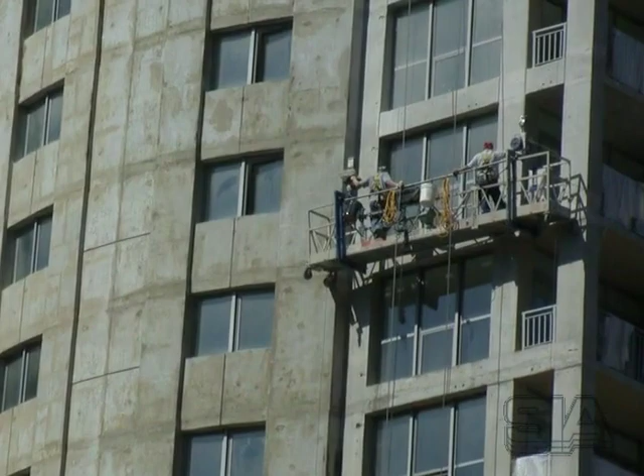The Scaffolding Industry Association, or SIA, is committed to safety. In order to prevent accidents, workers must be trained in the safe use of their equipment, be knowledgeable of the safety codes, and must be able to recognize and correct possible hazards.

Codes of safe practice for suspended scaffolds are available from the SIA SSFI. ANSI recommends procedures, while the CSA and OSHA regulate use along with federal, state, provincial, and local codes.

Suspended Scaffold Basic Rigging and Operating Procedures was developed by the SIA with input from suspended access manufacturers and distributors to help prevent accidents, which usually occur due to rigging errors and lack of fall protection. The material was obtained from many members across North America.

Suspended scaffolds and controlled descent equipment allow people to work at heights that can increase risk for a fall hazard. When properly assembled, rigged, and maintained, they can be used safely to perform a variety of difficult tasks efficiently. A key factor is proper rigging.

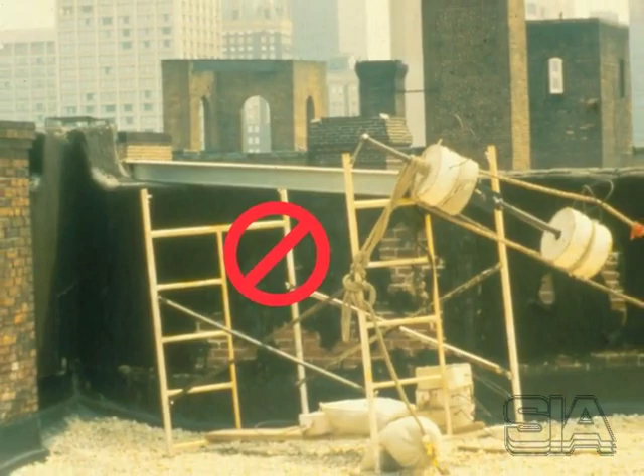Rigging is a very serious matter, since people's lives are at risk. Not only those suspended, but also bystanders below. A system haphazardly built from mismatched components will endanger lives or seriously injure you or others. Poor rigging is extremely dangerous. It will cause accidents. Follow guidelines and the applicable laws.

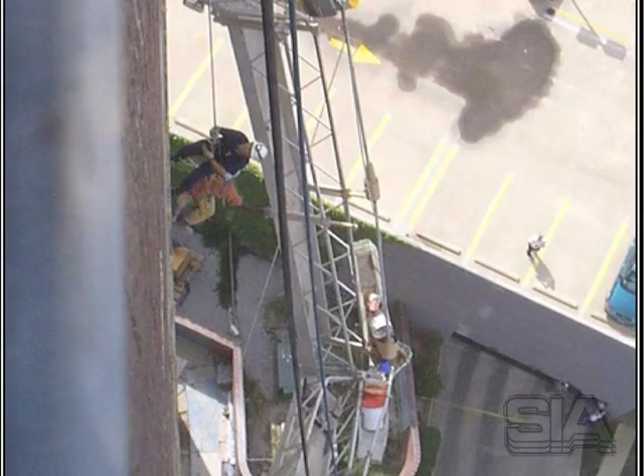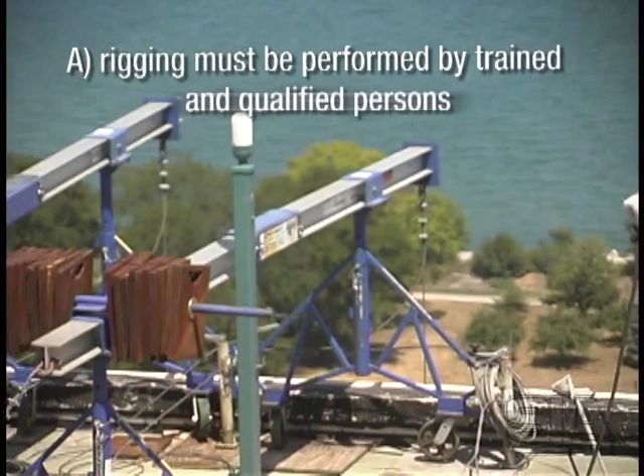The competent person must determine whether the equipment is in proper working order and rigged properly. A. Rigging must be performed by trained and qualified persons. B. All equipment must comply with federal, provincial, state, and local codes.

The employer must instruct and supervise employees in the safe use of equipment and provide manufacturer's instructions. Only workers who have been instructed in the operation, use, and inspection shall operate the suspended scaffold or controlled descent equipment. The SIA Suspended Scaffold Training Program provides these instructions.

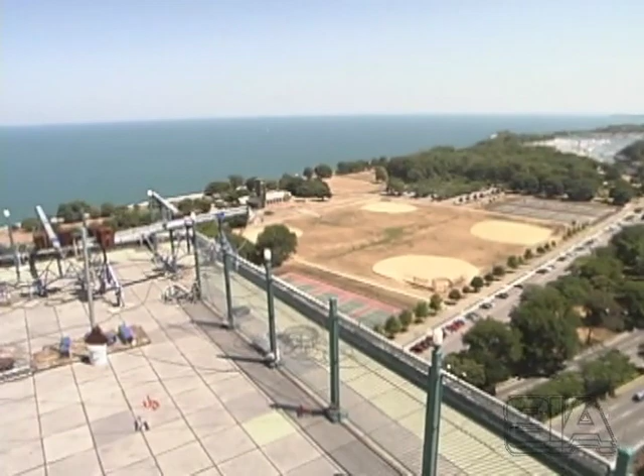A qualified person must develop a plan for installation and relocation of suspended access equipment. Refer to the SIA Job Hazard Checklist for suspended scaffolds for assistance. The 4 basic equipment groups that must be examined are: 1. The support equipment on the roof. 2. The suspended equipment. 3. The fall protection equipment. And 4. The wire ropes and power cords.

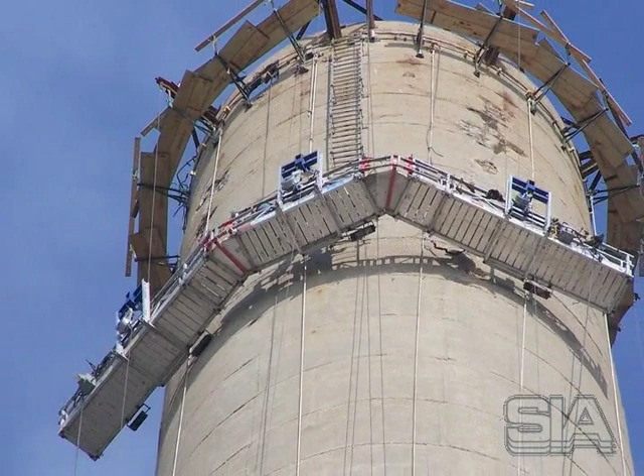Rooftops, vessels, and structures create various challenges. A qualified person needs to determine equipment needed and locate suitable anchorages for fall protection equipment. Structural parapet walls must be capable of withstanding the overturning loads imposed on them with a safety factor of 4. A qualified person must evaluate the parapet. If any question exists, do not rig from it or rest a beam on it.

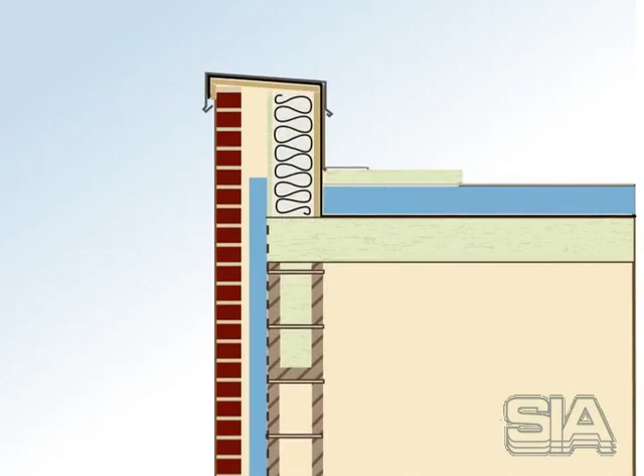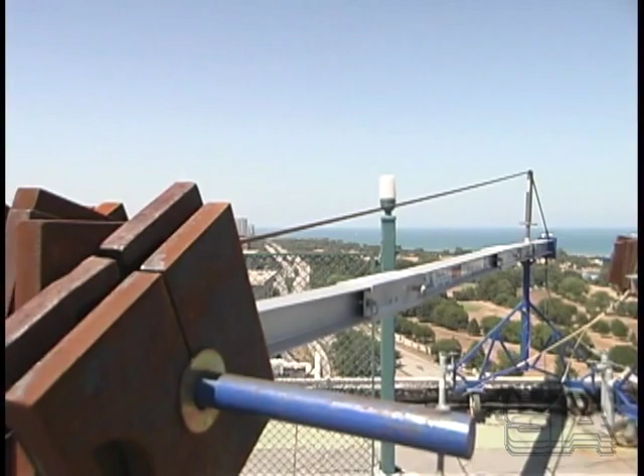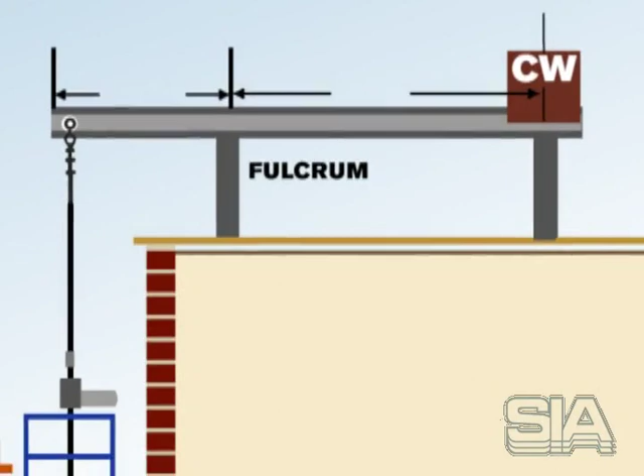Qualified persons who provide structural drawings of a parapet must beware of block, brick, stone, expanded foam, or metal-covered parapets, which probably will not take the load. Counterweighted outrigger beam systems should be used when the parapet strength is questionable. This system must be designed and assembled to resist 4 times the overturning moment created by the hoist or suspended load. A formula determines the counterweight needed to provide a safety factor of 4.

Calculations must be accurate. If the outreach changes, the counterweight must be recalculated by a qualified person. Excessive outreach can cause the beam to fail. All rigging has limitations. Follow the manufacturer's instructions.

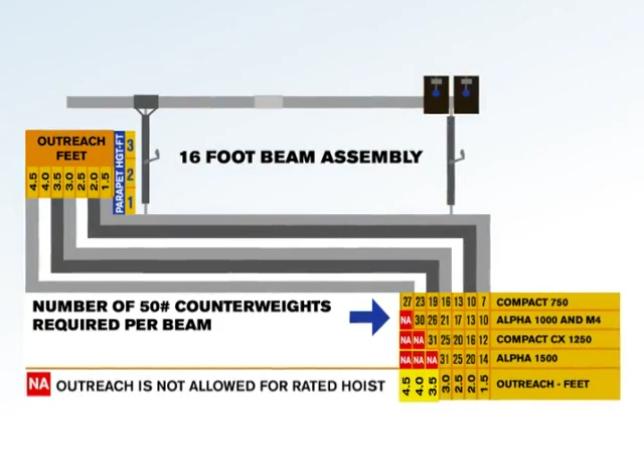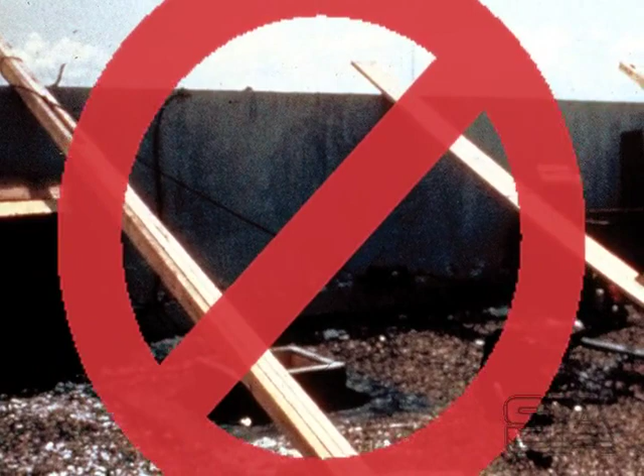Protect the roof and distribute the load at the bearing points using plywood or planks. A qualified person must be able to determine that the roof can carry the load of the rigging. Do not use outrigger beams made of wood. Do not use flowable materials such as sand or water for counterweight materials.

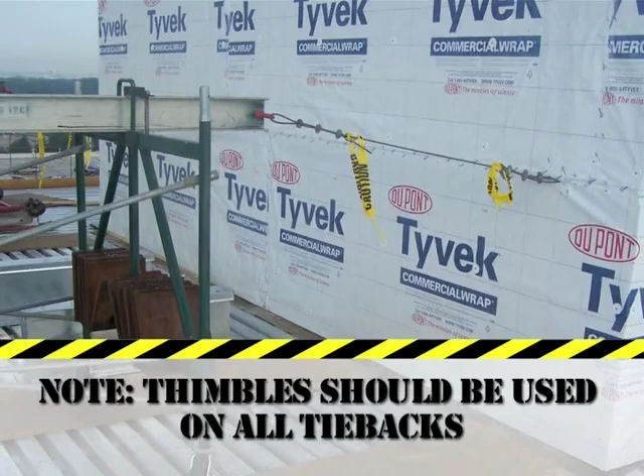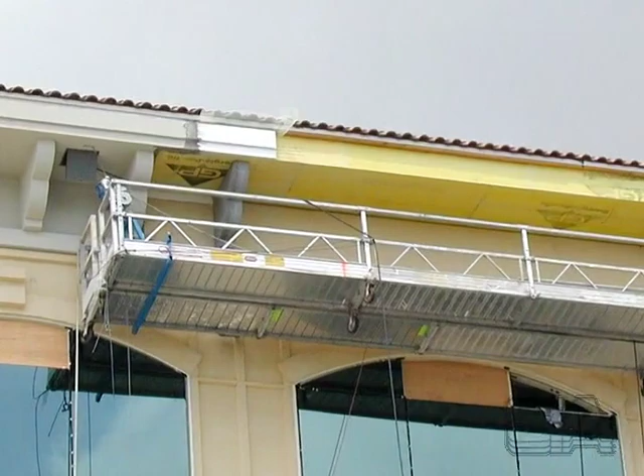Tiebacks are mandatory to prevent rigging devices from moving and coming off the structure. Movement can spell disaster. Shown is a proper tieback. Spacing is critical to avoid unintended movement or overturning of the topside rigging or platform, and will prevent excessive forces applied against the structure. Hoist to hoist and outrigger to outrigger attachment spacing must be the same, in addition to hoist to wall spacing.

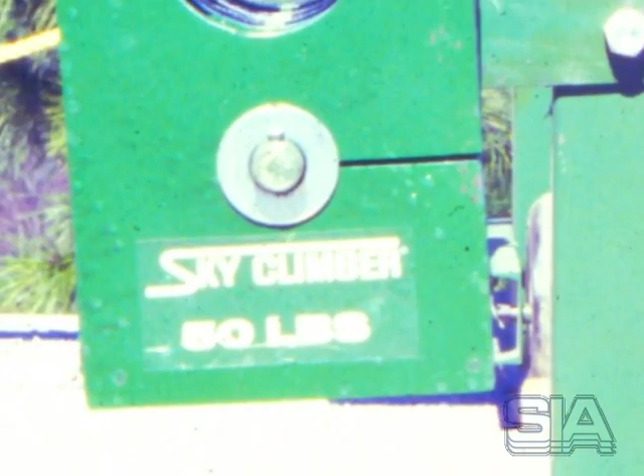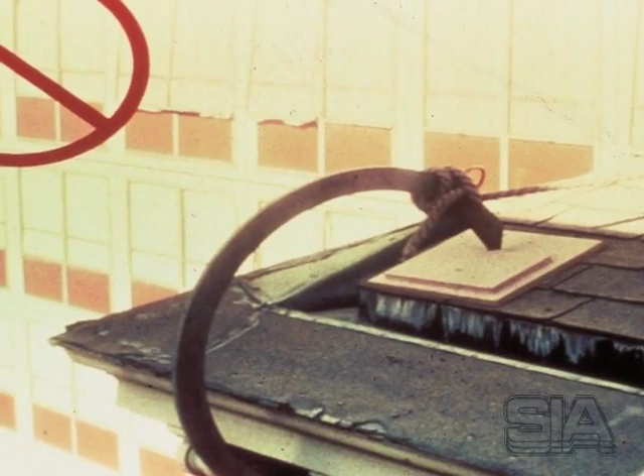Counterweights should be marked to indicate their weight. They must be secured to the beam as per the manufacturer's instructions. If a parapet is structurally sound, a parapet hook or clamp may provide a useful solution. Check with the building owner. These are examples of improper parapet hook and parapet clamp usage.

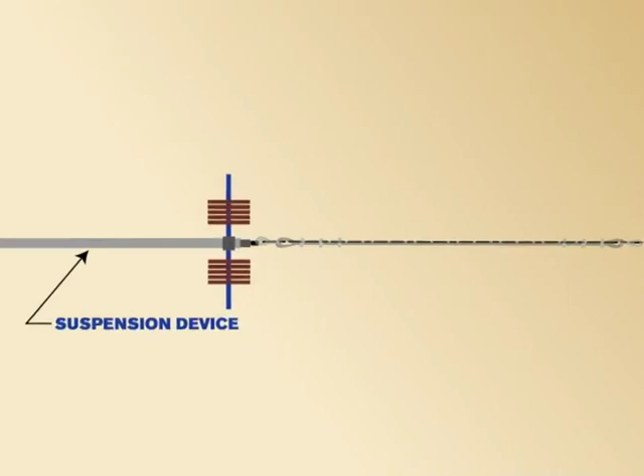Here is a properly installed parapet clamp, tied back and blocked for bearing. The tieback must be equivalent in strength to the suspension rope. It should be taut and at right angles when possible. If you cannot tie back directly behind the rigging device, use two tiebacks at opposing angles to prevent movement.

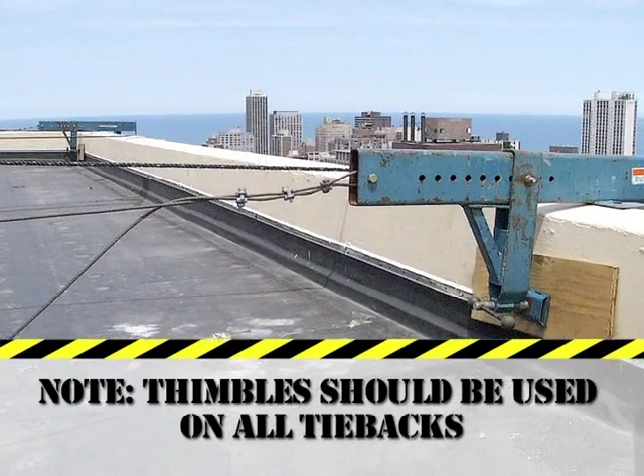Parapet clamps must be tied back or tied down to a secure member. When correctly installed, the tieback will prevent the clamp or beam from coming off the roof. A thimble and 3 J-clamps for 5/16" wire rope is used to fasten the tieback to the rigging device. Follow the clamp manufacturer's torque specifications and torque settings.

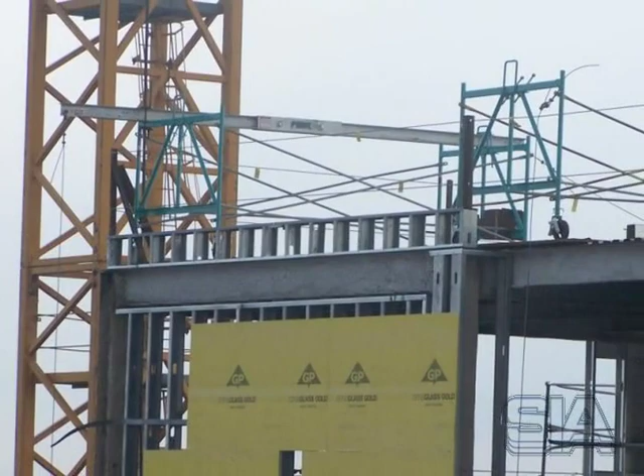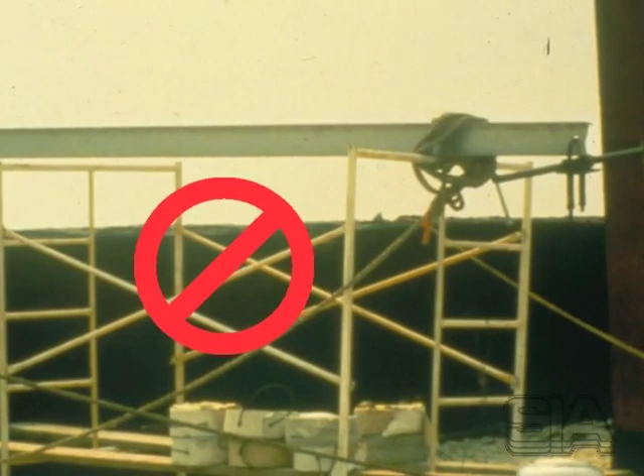The outrigger support frame must be designed for that purpose. The outrigger puts a concentrated load on the frame. If the frame header was not designed to support that concentrated load, it may fail. The beam should be fastened to the bearer, and counterweights should be within the confines of the scaffold legs to prevent overturning should the suspended load be removed. Here are some examples of an improperly rigged outrigger beam. Here are some properly rigged outrigger beams.

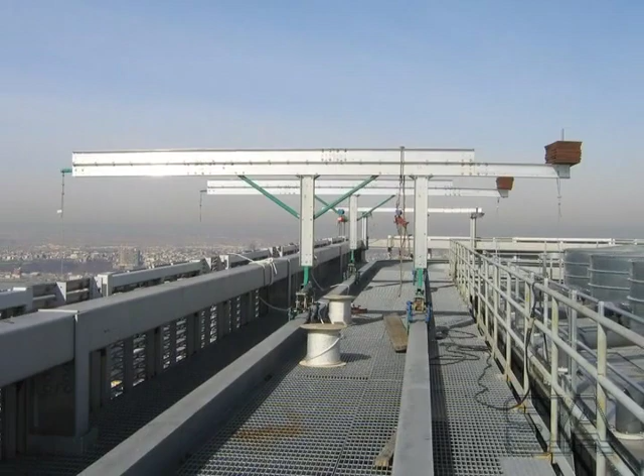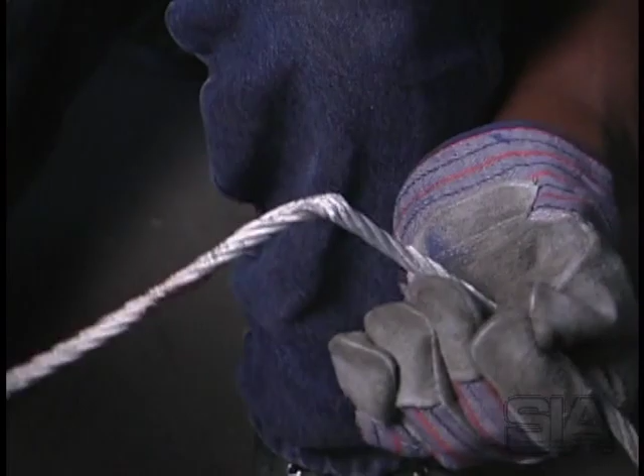Proper rope handling and maintenance are critical for safety. Inspect the rope before putting into use. Check for wear, broken wires, kinks, burns, bird cages, corrosion and chemical attack. Pad ropes that contact any surface to prevent abrasion damage. Burned rope must be scrapped. Heat causes reduced strength and brittleness. Synthetic ropes also are degraded by heat.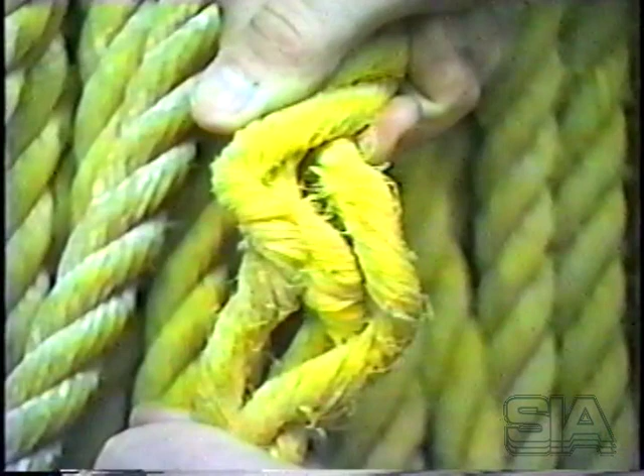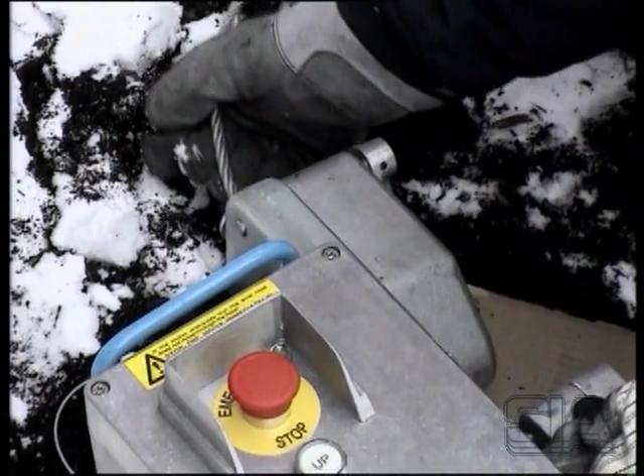Wire rope must meet hoist manufacturer specifications. Diameter and construction are critical for safety. Distortions and bird cages are unacceptable, as shown here. The tip of the wire rope must be prepared per manufacturer's instructions. Traction hoists must reeve the rope. A good tip is important.

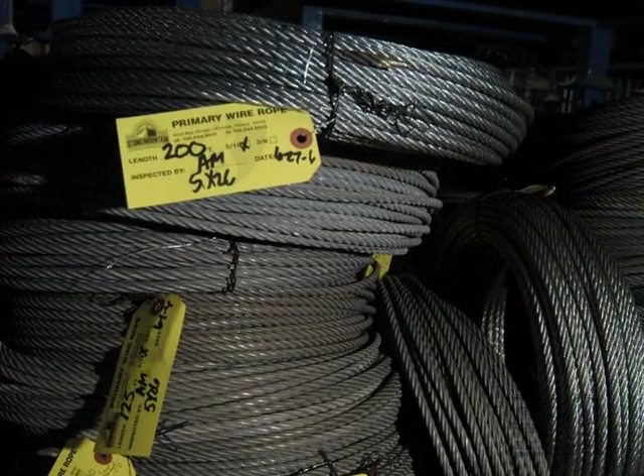All rope should be tagged with condition, length, and construction marked for easy identification. This will help match the rope for the equipment and job. For example, red equals needs inspection. Green equals ready to be used. Make sure to red tag, destroy, and discard bad rope to prevent it ever being used.

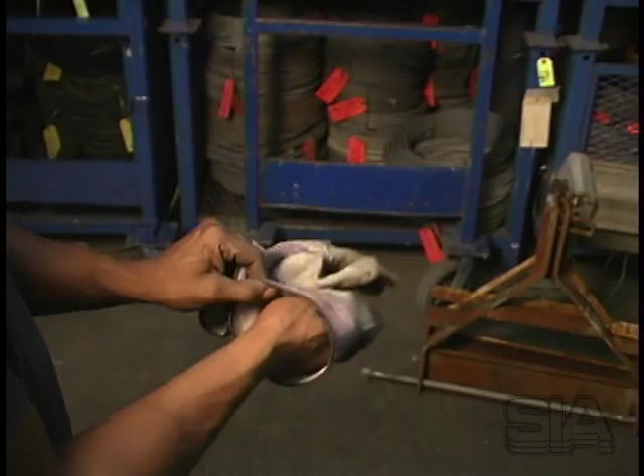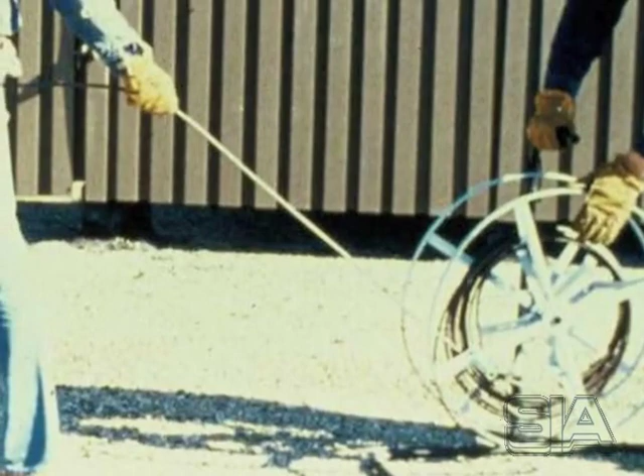Avoid kinking rope when unwinding it. Wear gloves and handle properly. Do not lay a coil of wire rope on its side to unwind. Use a mechanical assist when lowering from tall structures to maintain control. Use caution in windy conditions.

Extreme caution should be taken when lowering ropes or operating the stage in the vicinity of exposed electrical wires. The hazard increases as voltage rises. Consult your local power authority before commencing any work. The leading or bitter end of the rope must be long enough to reach the ground or lowest safe landing.

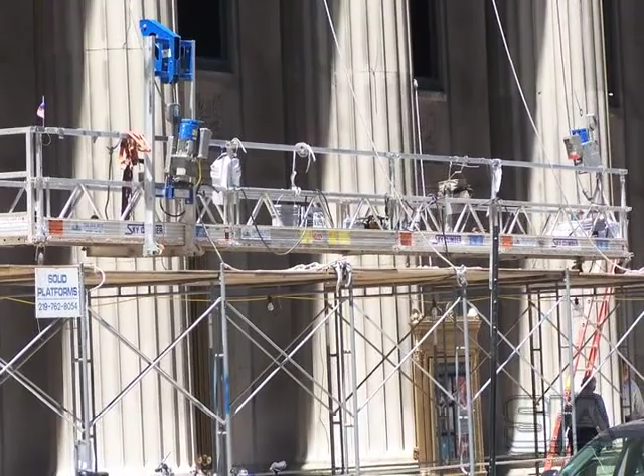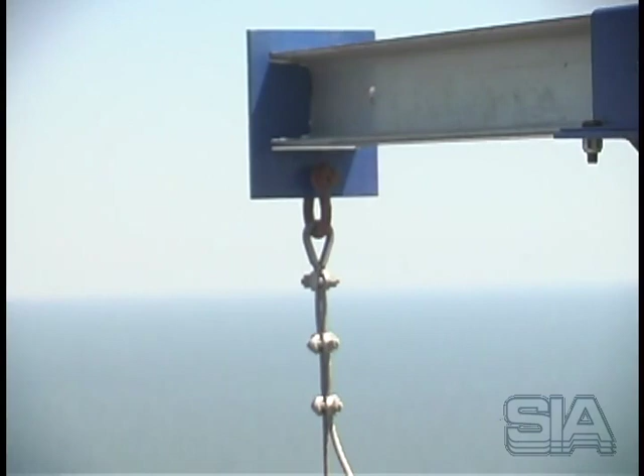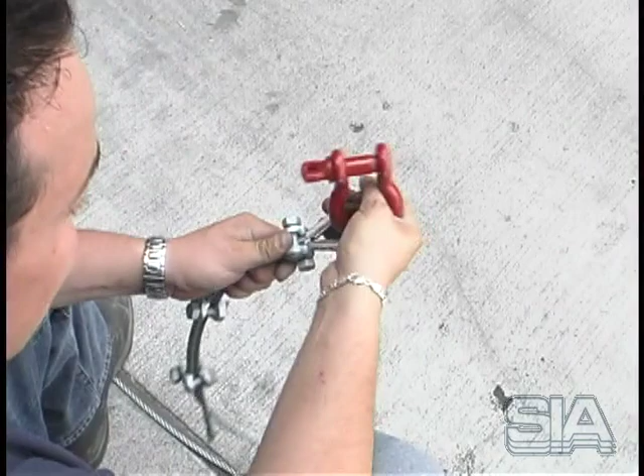Secure the upper end of the wire rope to the suspension point. There are several methods of doing this. If you use wire rope fittings, you can protect the wire rope from damage and make a stronger connection by using a thimble, 3 J-type wire rope clamps, and a shackle. For 5/16" wire rope, the first J-clamp should be next to the thimble and the others every 3 inches apart. Follow the clamp manufacturer's torque specifications and torque settings.

Retighten the clamps periodically since wire rope will stretch, causing its diameter to become smaller once load is applied. This could result in the clamps becoming loose. If a swage fitting is to be used, the swaging must be done by a qualified person or the rope manufacturer qualified in this area. Do not use U-clamps. Excess wire rope can be easily damaged. Store excess wire rope at the roof or suspension level to minimize damage.

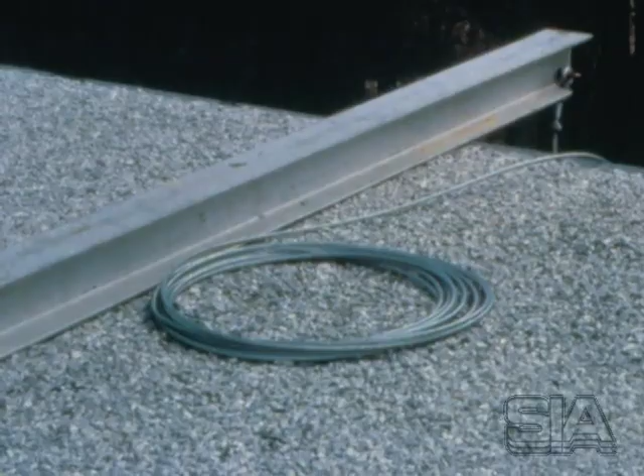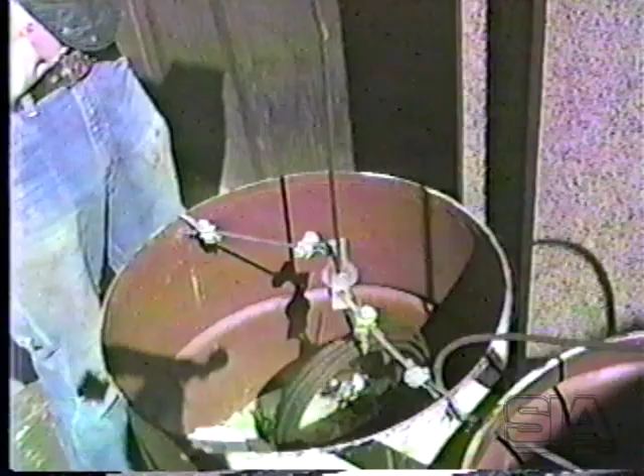Always keep the suspension rope vertical above the hoist. Wire rope which hangs below the hoisting machine must be free to rotate to prevent bird caging. Always use thimbles and shackles. Never terminate on a sharp edge. Protect against cutting and abrasion.

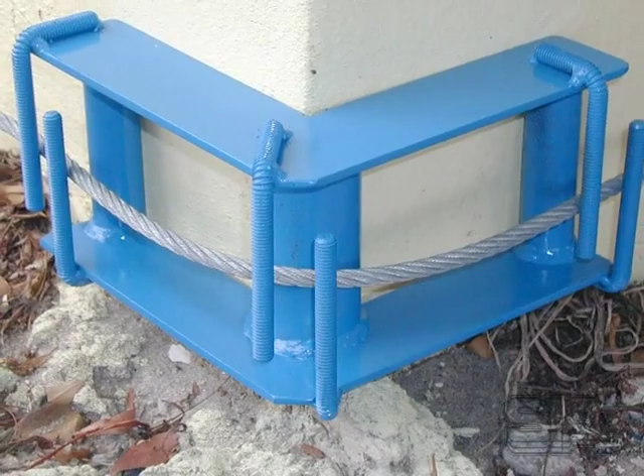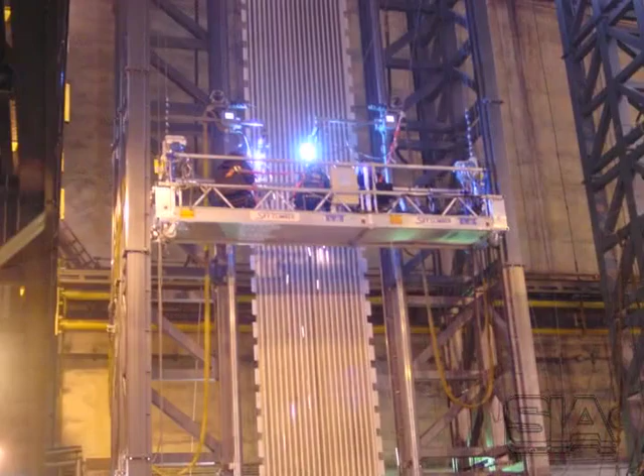When welding from a suspended scaffold, ground the scaffold as close to the work as possible. Protect wire rope with a rubber hose or some other insulator approximately 5 feet above and 2 feet below the hoist. This will prevent possible arcing and damage to the wire rope should someone accidentally hit the wire rope or the stage with a welding stinger. Use extreme caution when welding from a suspended scaffold. Use an insulated thimble on the primary suspension rope and also insulate the tieback rope. Welding near steel wire rope of suspended stages, as in applications such as the one shown here, is extremely dangerous.

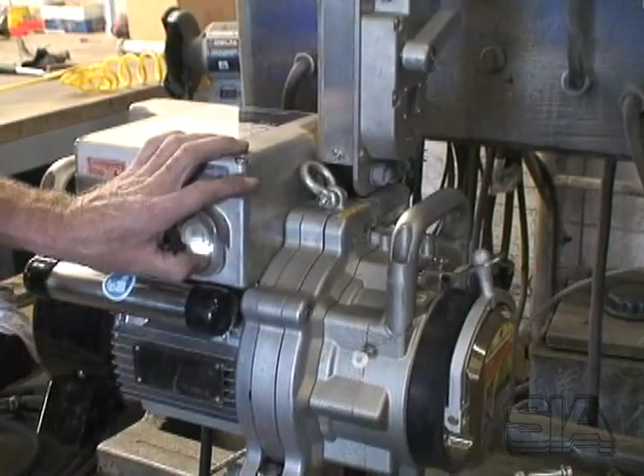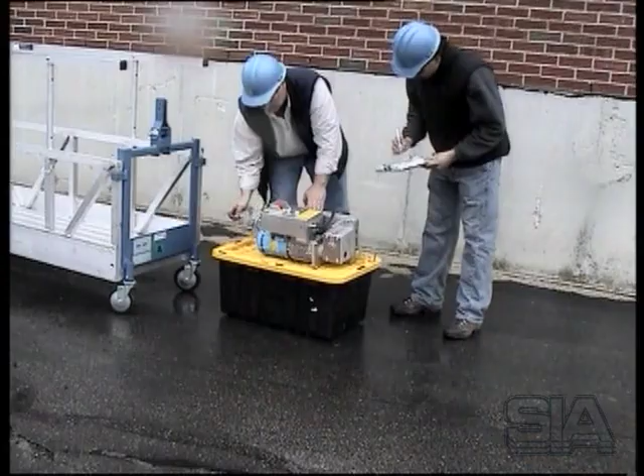Use only hoists that are tested and classified by a qualified lab. Be sure the hoist has been completely load tested prior to use at the job site. Once the hoist has been received at the job site, inspect all critical items to assure they have not been damaged during equipment transit. Refer to manufacturer's instructions for daily inspection and testing. Is the electrical connection intact and compatible with the electrical cable? Are the housings and shields intact? Does the overspeed brake work? You must answer these questions positively before proceeding.

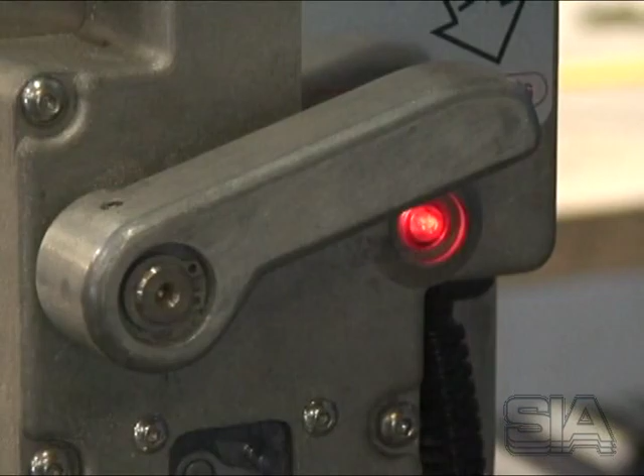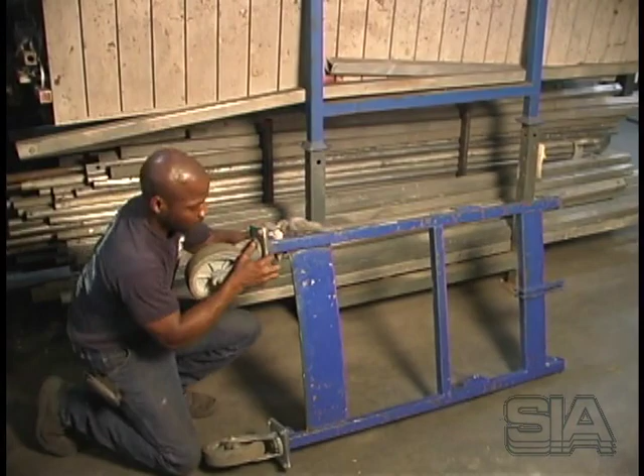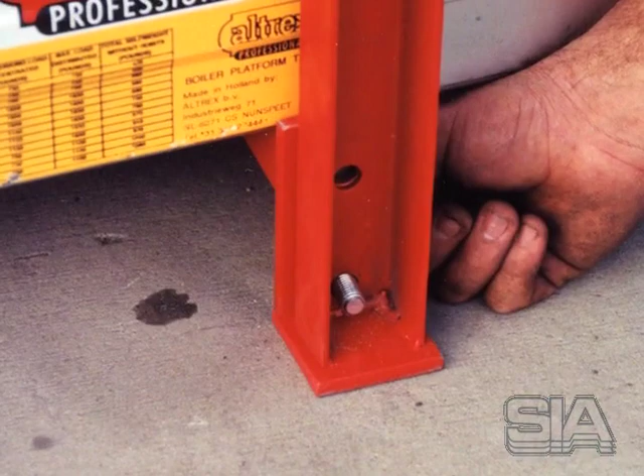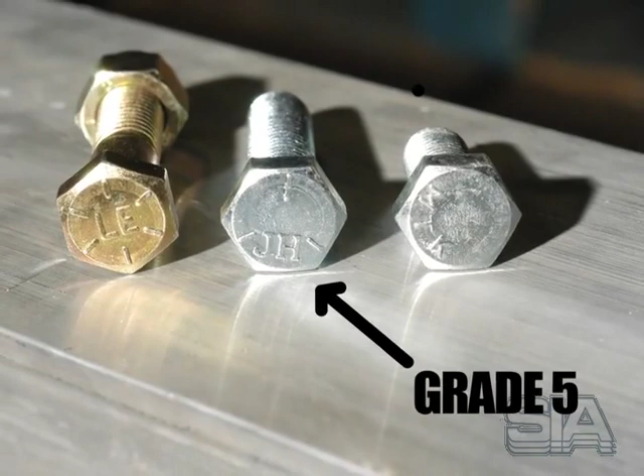Stirrups are a critical item. They transfer the suspended load to the hoist. Prior to use, inspect for cracks, bends, and damage to welds. Be sure to use only that hardware recommended by the manufacturer. Do not substitute. Use only the hardware recommended by the hoist manufacturer to attach the hoist to the stirrup. Grade 5 or better bolts are required. Beware of substandard hardware. Use only fabricated platform hold-down bolts provided by the stirrup manufacturer. Do not substitute.

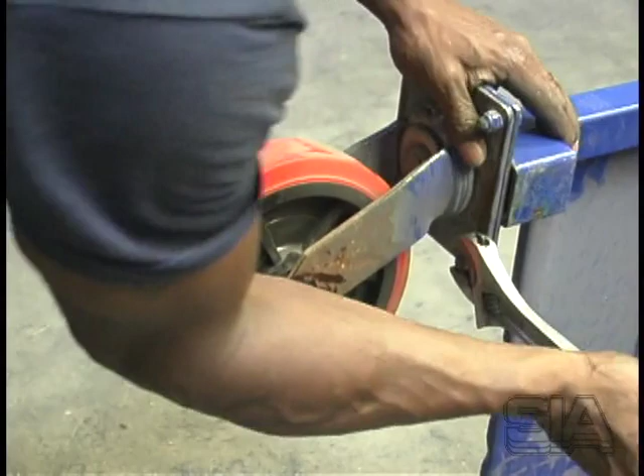Make sure casters and all other components, including tools, are secure. Components that fall off while the platform is suspended could kill or seriously injure someone, as well as cause property damage. Is the suspended scaffold damaged by acid? Is there visible damage? Is the platform of the proper rating?

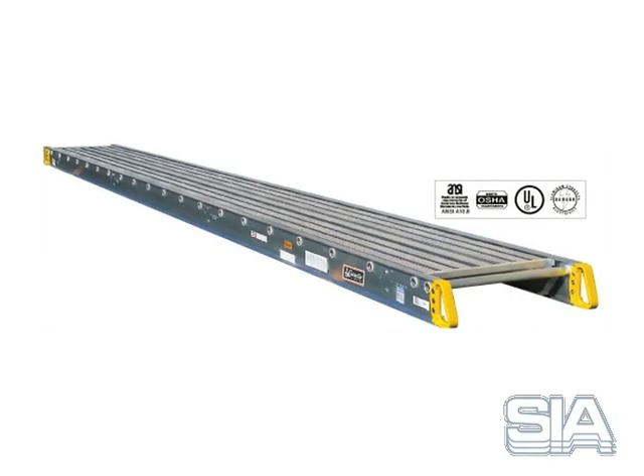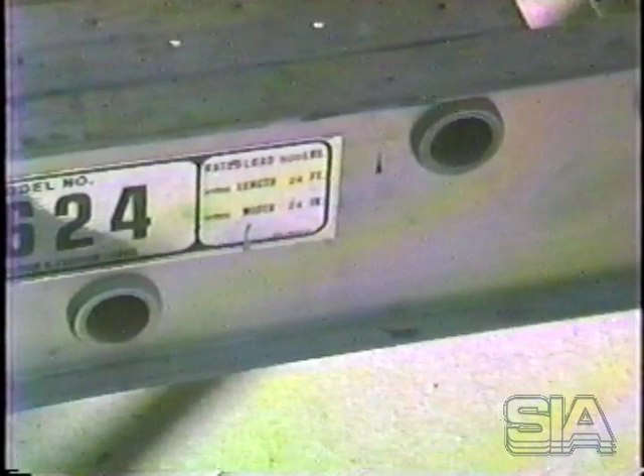Remember, a fabricated fixed-length platform rated for 3 persons is designed to carry no more than 750 pounds. A fabricated fixed-length platform rated for 2 persons can carry only 500 pounds. Modular platforms have rated loads that change with length. Refer to the manufacturer's manual. Check the rating of the platform.

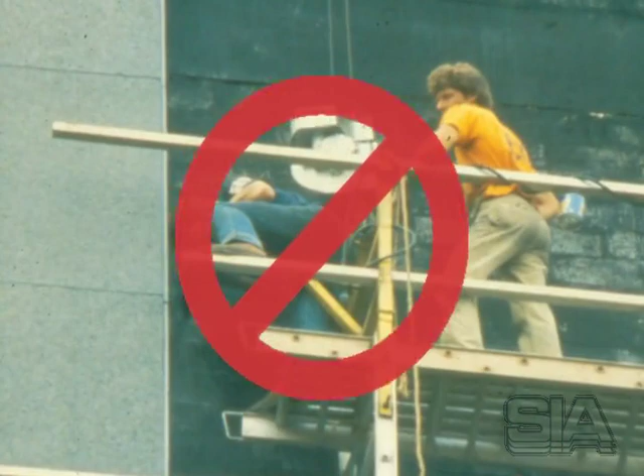Select a platform that is of the proper length. The platform shown in this scene is much too long. However, if the stage is too short, workers will be tempted to stand on the stirrup or end rails to reach out further to complete their work. This is an unsafe act. Do not do it.

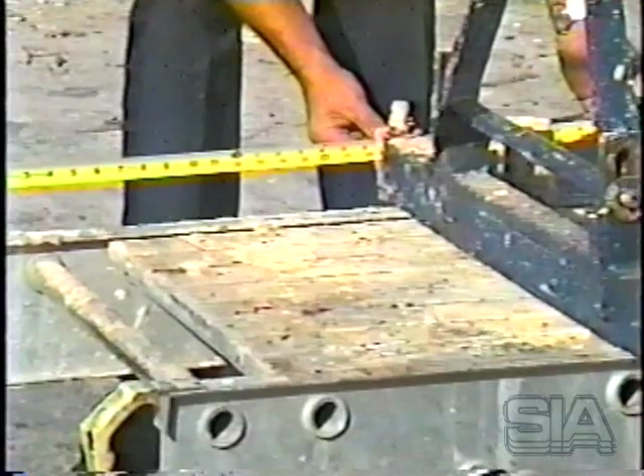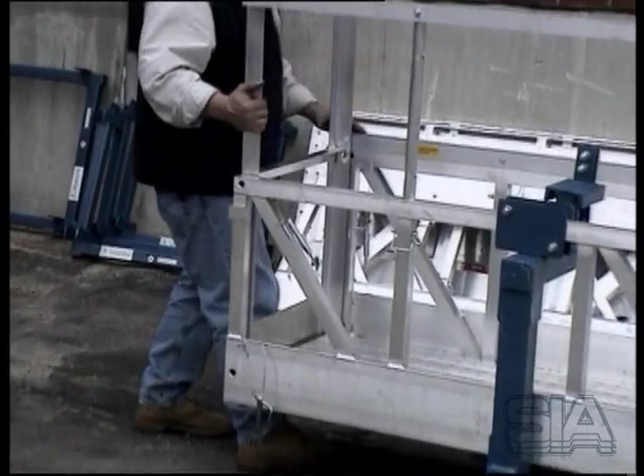Stirrups should be installed 6 to 18 inches from the end of the stage for fixed-length platforms. When so installed, non-walk-through stirrups serve as end rails. Confirm that the A-frames are not damaged and that all bolts have double nuts or cotter pins to keep the nuts from backing off.

Most modular platforms have built-in guardrails and end stirrups. If using walk-through stirrups, always use end guardrails. Always check with the manufacturer for proper configurations and assembly. A guardrail system is required even when fall arrest equipment is used. Install sufficient guardrail posts to adequately support the guardrail system.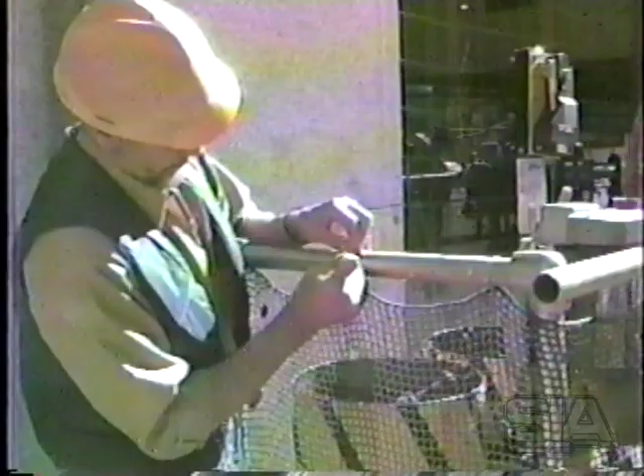Where persons are required to work or pass under the scaffold, install a safety screen or equivalent between the toe board and top rail. Precautions must be taken to prevent the scaffold from damage when acids or other corrosive substances are used.

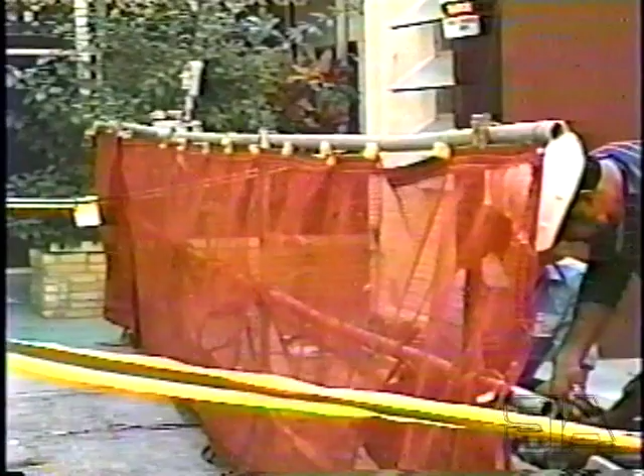Electrical cables should be properly grounded and inspected for continuity as well as for broken or cut insulation. Use only electrical cables that are sound. All connections must be of the correct type and amperage rating. Always use a strain relief device to keep the weight off electrical connections. Knots do not work and can damage the cord.

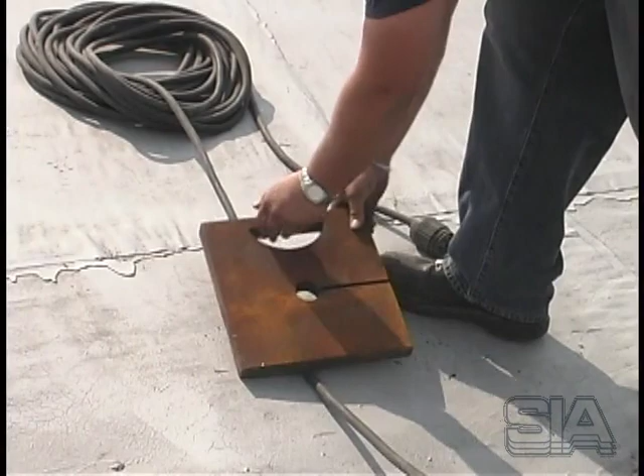When we talk about relieving the strain on electrical cables, we don't mean by putting weight on it, as shown in this improperly rigged installation, or tying it around sharp corners.

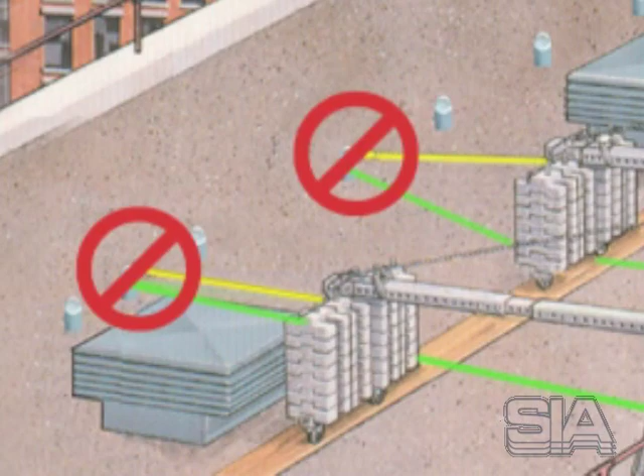Each lifeline must be able to support a worker in the event he should fall. In addition, the lines must be attached to separate, structurally sound points. Do not tie off from the same point on a structure to which the suspension device or tieback is attached. Vertical lifelines must be attached to anchorages that can take the required load. That point may be quite a distance from the rigging.

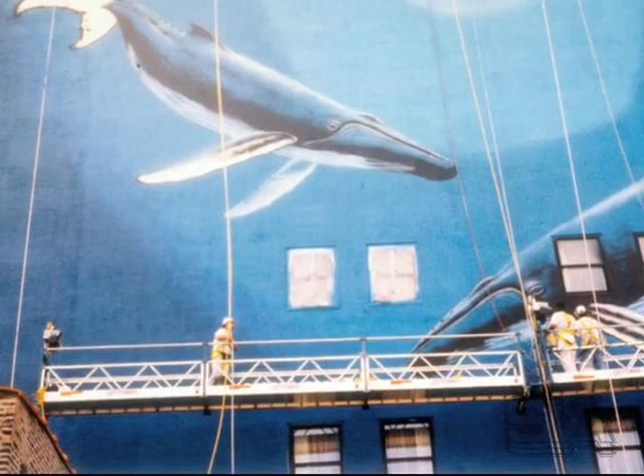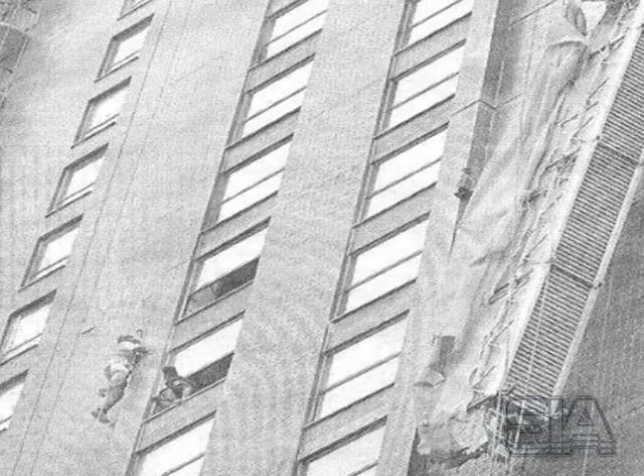Lifelines should be suspended directly above each worker on the suspended platform. Doing so will minimize the worker's pendulum effect in the event the lifeline is called upon to suspend the worker. Do not tie off to vent pipes, chimneys, or other structures that cannot hold the complete load.

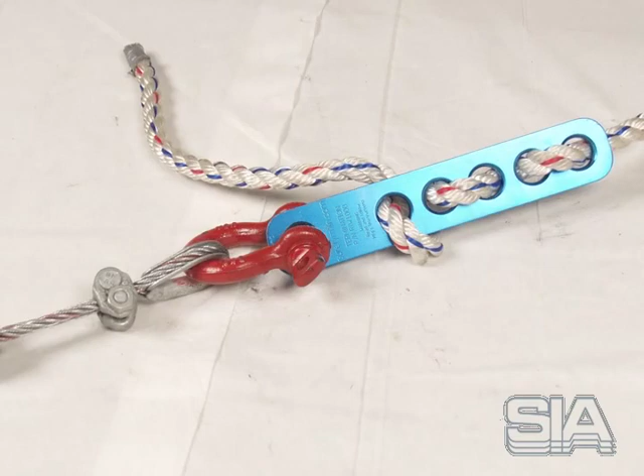Always cushion the lifeline against damage from sharp edges by using a piece of rubber hose, wooden buffer, or other protection. Be sure the protection devices are secured against movement. Do not use knots to terminate lifeline or synthetic rope. Secure the lifeline to an independent anchorage on the structure with a mechanical splice termination plate, or, where allowed by law, an approved knot that retains the required strength of the line. Always check local codes.

Lifelines should be secured at the bottom with weights or attached to structures. This keeps the line taut and allows the fall arrestor to move more efficiently. All harnesses, lanyard hardware, lifelines, and anchorage points must meet the requirements of the codes applicable to the jurisdiction where the work is being performed.

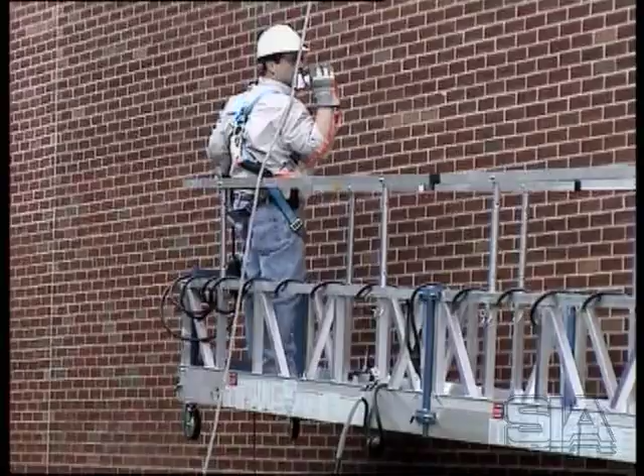Lanyards must have double locking snap hooks or be spliced directly to the fall arrestor. The harness D-ring is located between the shoulders of the body to minimize injury in case of a fall. Shock-absorbing lanyards must limit free fall distance to less than 6 feet. They must be connected to the rope grab device above shoulder level. Following this practice will minimize the distance traveled and the severity of injury should there be a fall.

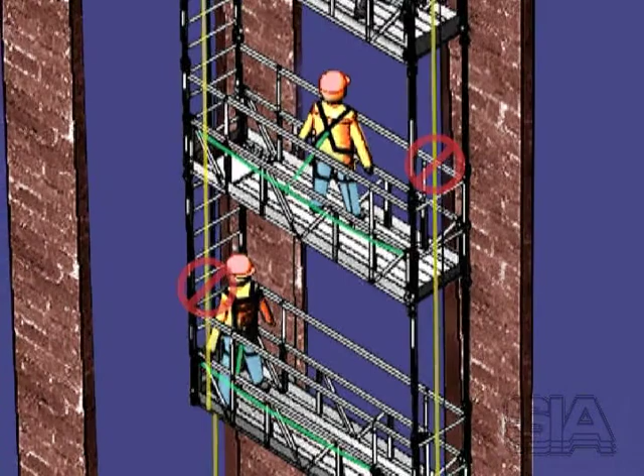When using a multi-tiered swing stage assembly or a single stage with overhead protection, workers on the lower stage or stages must secure their lanyards to a structural part of the stage itself and not to an independent suspension line. Workers on the top level can use a lifeline if the stage does not have overhead protection. Hoists must be rigged with primary and secondary wire ropes attached to separate points of anchorage.

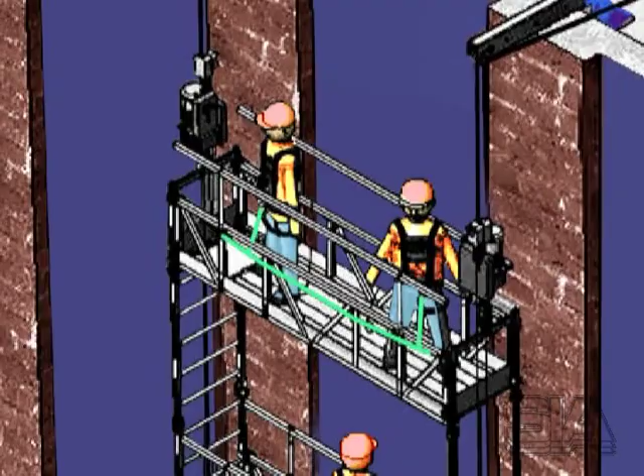Where workers are required to move back and forth along the stage, a horizontal lifeline should be installed along the back of the stage to which their lanyards may be attached. Both ends of the trolley line must be attached to a structural member of the stage. In order to minimize the distance a lanyard would travel on the trolley line, mechanical stops should be installed at distances not to exceed 10 feet.

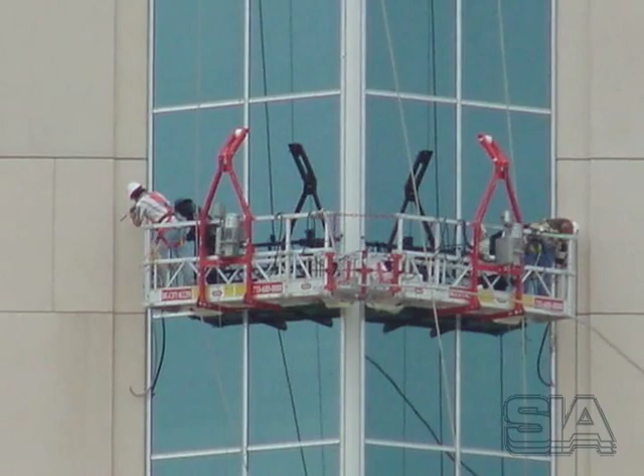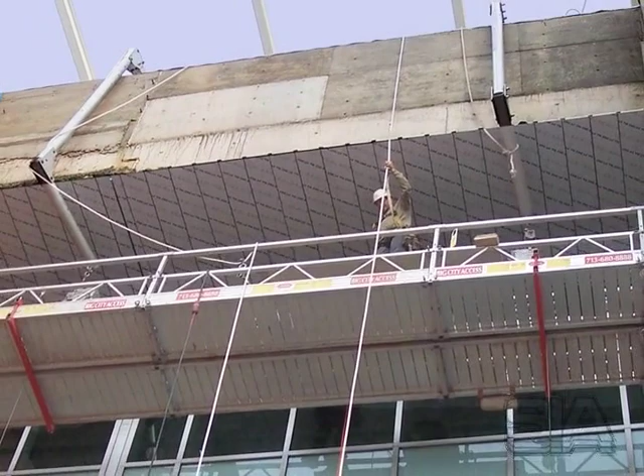In summary, all persons working with suspended scaffolding must be trained in the proper usage of all equipment and safe rigging practices, and must be educated on the importance of properly installing and using safety equipment. Together with the Scaffolding Industry Association, we can make the elevated workplace safer.